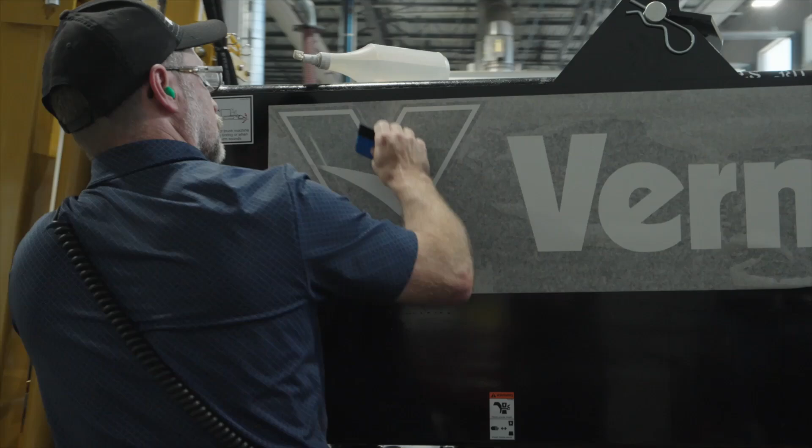Vermeer is a grassroots company of local people, some of the best engineers I know, and they use SolidWorks.

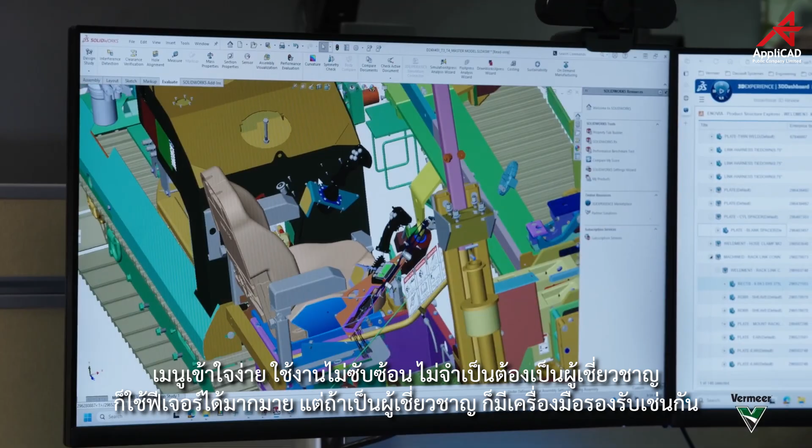When it first came out, it was much easier to use than other solid modeling type packages. I think it continues to be that way. The menus are intuitive, easy to understand. You don't have to be that expert user to take advantage of a lot of its features. If you are that expert user, it has those, but you can operate at that entry-level user and do really well.

It's important to have a package that you can be efficient at with minimal training and minimal seat time on the modeling. One of the machines that we use SolidWorks to design is our medium drill.

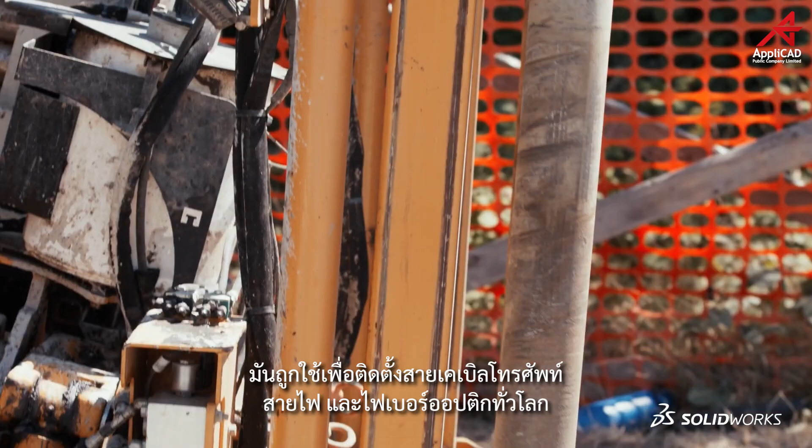The medium drill is used to put in utility cables for phone lines, electrical lines, fiber optics throughout the world. It is a very complex machine with a lot of hydraulics and electrical on board. A lot of features to help the drillers make good decisions, whether it's water or sewer lines.

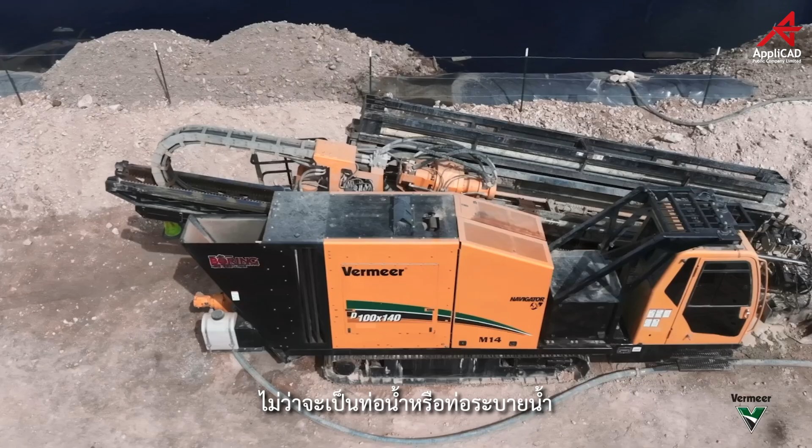And we use SolidWorks for the entirety of that design. There's no other CAD for mechanical design here at Vermeer. There's so many other little parts of SolidWorks that we integrate with, as far as doing structural analysis. Being able to do multiple configurations, I think, is nice.

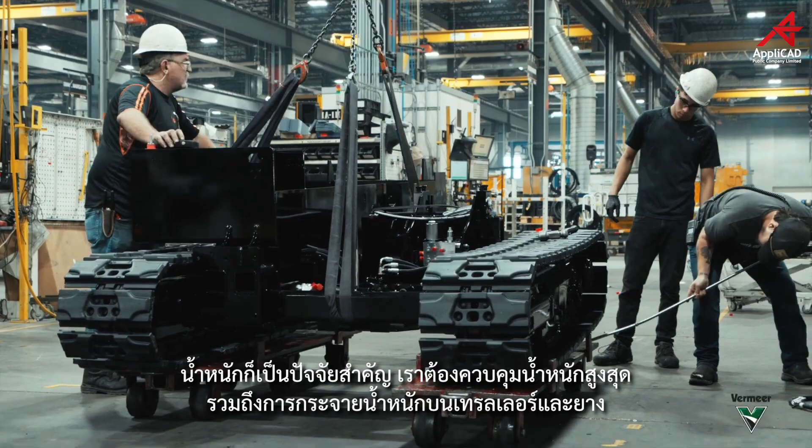Weight was a big issue for us. We had to maintain a certain max weight. You had the weight distribution on the semi-trailer versus the tires, and we had to move the center of gravity around.

It's so fun to be able to show a concept to someone who's not in front of SolidWorks every day, to try to explain to them maybe how a part fits together. You can quickly show them any of those parts. You can show them the inside of the part, you can show them the back side, you can rotate around a little bit, you can communicate faster and get on the same page.

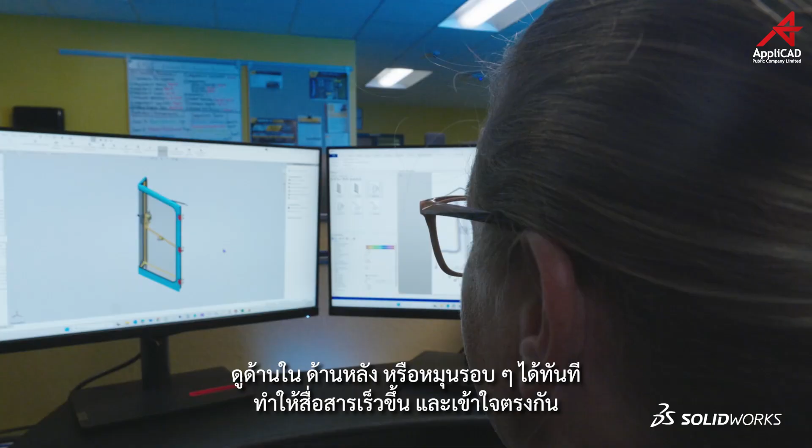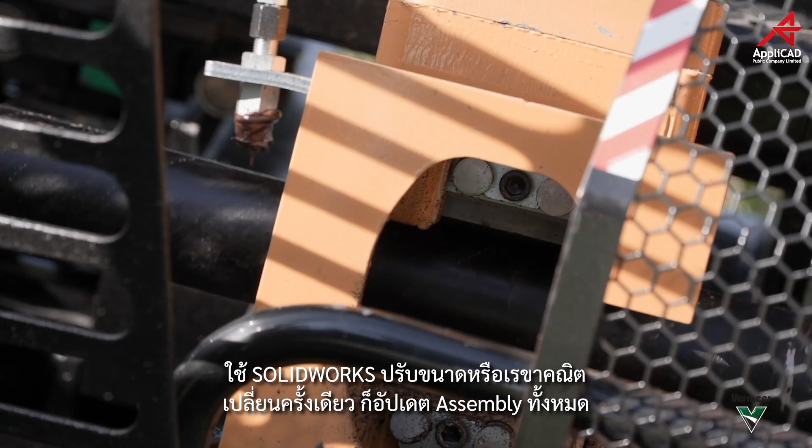One of the advantages of working with SolidWorks is our ability to reuse components throughout many different models of drills, and many of those components can be reused from one drill to another. Take an idea from one drill, size up the geometry with SolidWorks' parametric modeling. It speeds up your process - you change the part once, and it propagates that change throughout the assembly models that part is used in.

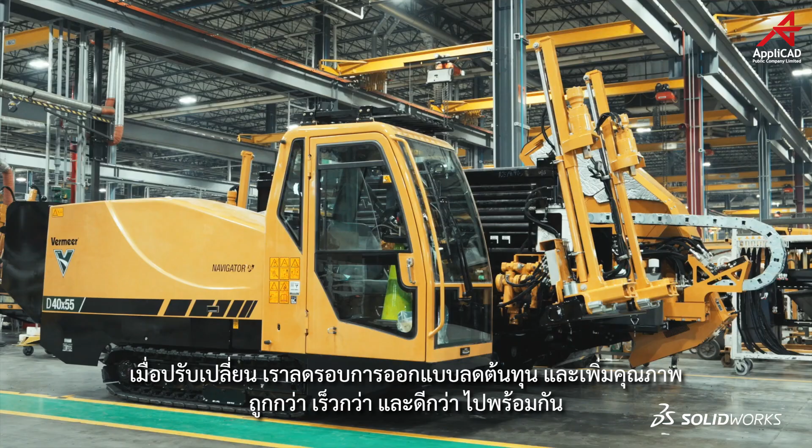When we make these changes, we reduce design cycle times, which reduces cost, and we improve quality. So it's kind of a cheaper, faster, better all at the same time.

When I started, Vermeer was significantly smaller. SolidWorks continued to grow with us and allowed us to do the things that we needed to do that our customers and our team members have been asking for.

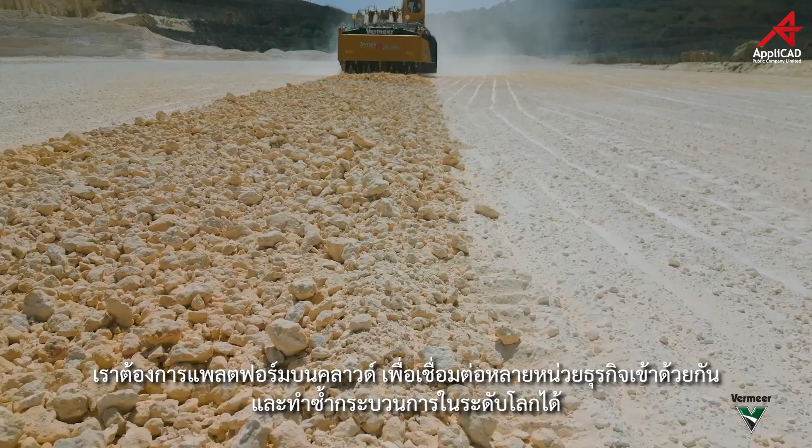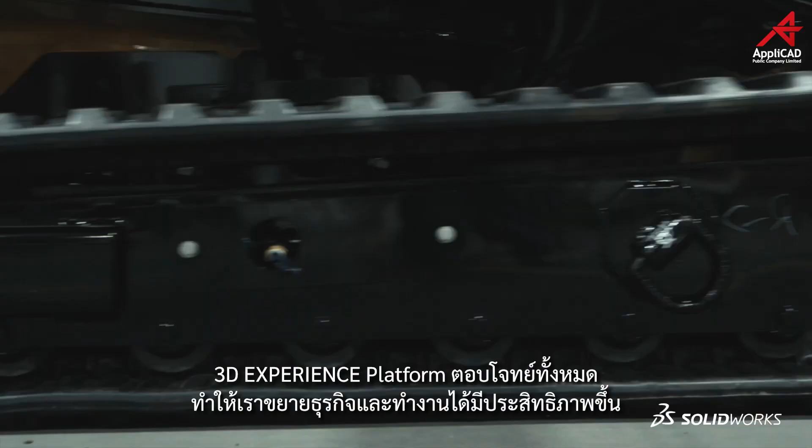I would say SolidWorks is one of the reasons why we picked the next move. We wanted a platform that worked on the cloud. Then we wanted to be able to integrate different business units and be able to replicate those processes globally. The 3D Experience platform provided that level of functionality that we needed to grow as a company and continue to get more efficient in those processes.

It's a very versatile, useful software that doesn't restrict us - it's just a matter of your imagination, what you can come up with.